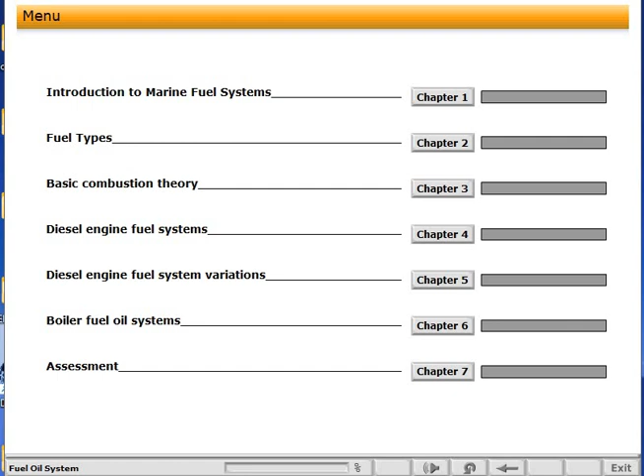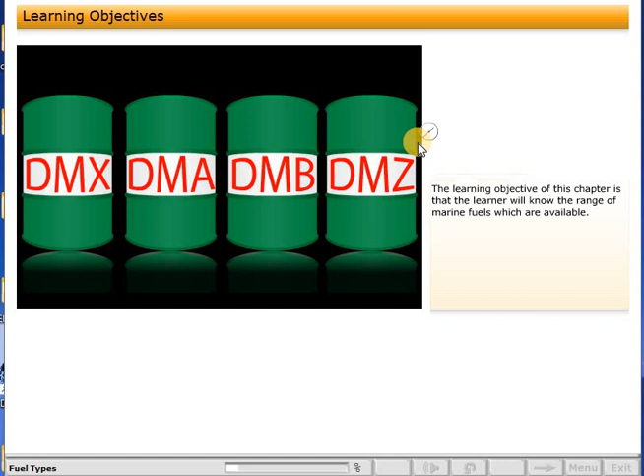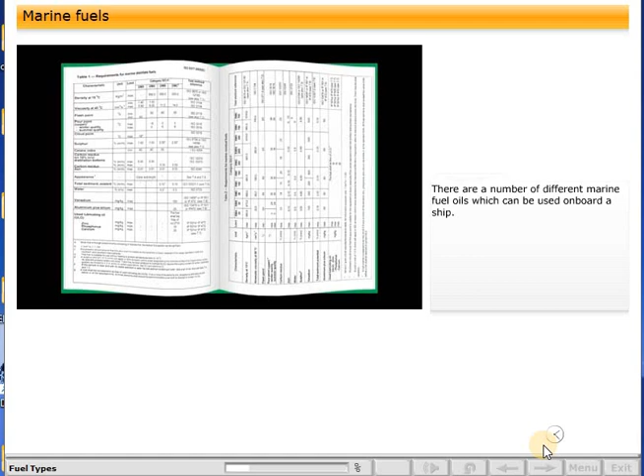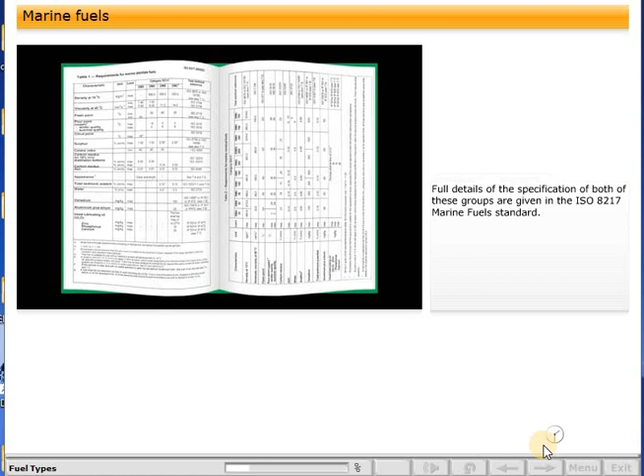The learning objective of this chapter is that the learner will know the range of marine fuels which are available. There are a number of different marine fuel oils which can be used on board a ship. They can generally be classed into two groups, distillate fuels and residual fuels. Full details of the specification of both of these groups are given in the ISO 8217 Marine Fuel Standard.

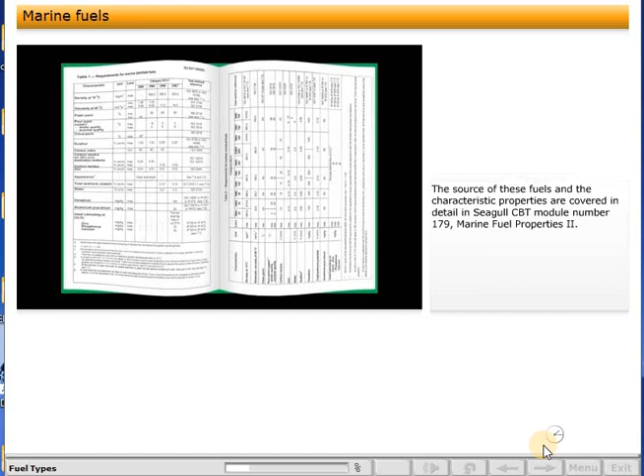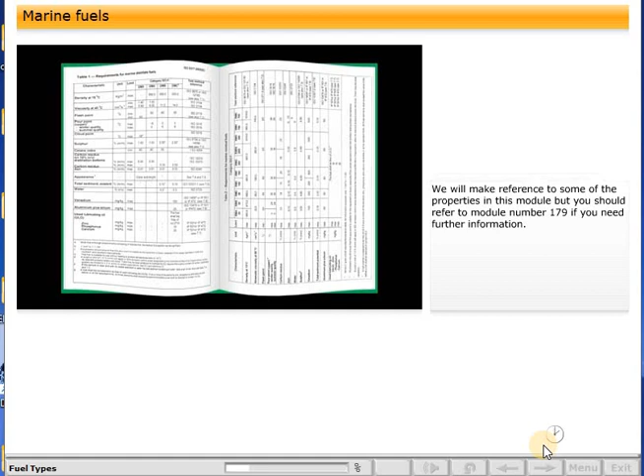The source of these fuels and the characteristic properties are covered in detail in Seagull CBT Module number 179, Marine Fuel Properties 2. We will make reference to some of the properties in this module, but you should refer to Module number 179 if you need further information. The actual fuel being used will, to some extent, determine the components in the fuel system.

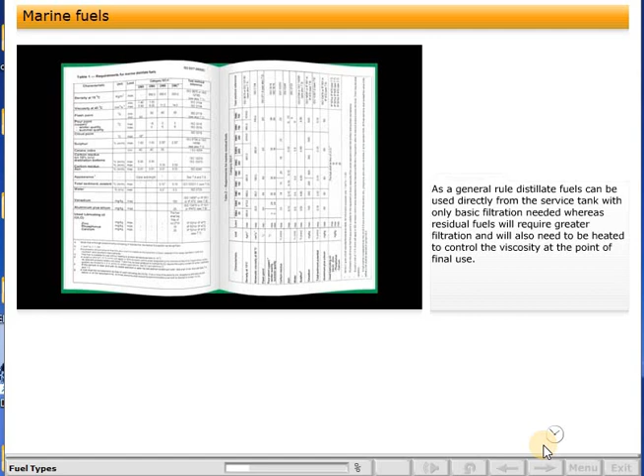As a general rule, distillate fuels can be used directly from the service tank, with only basic filtration needed, whereas residual fuels will require greater filtration, and will also need to be heated to control the viscosity at the point of final use. We will look at some of the common fuels next.

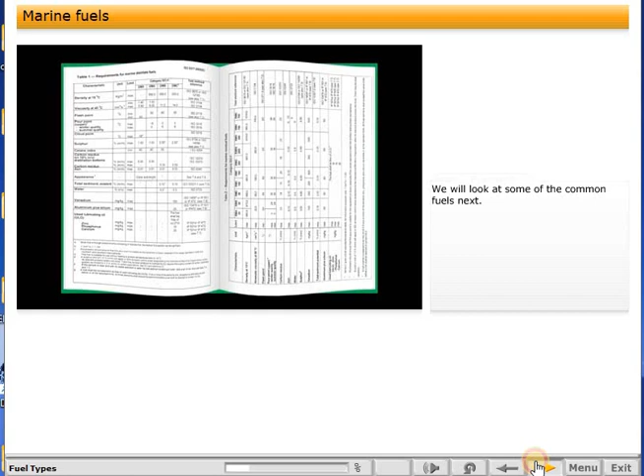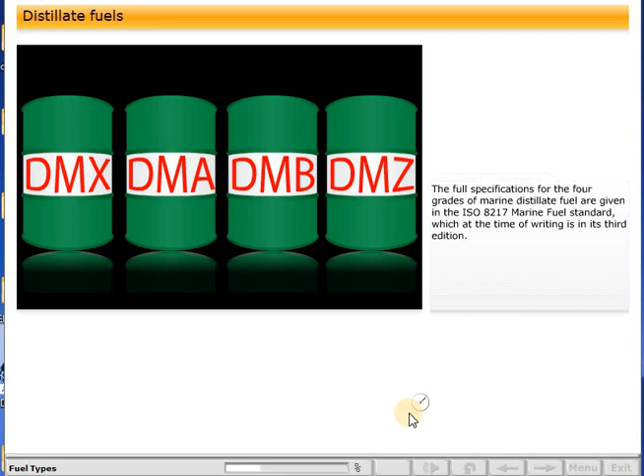Distillate fuels, strictly speaking, are those fuels obtained directly from the distillation process as a result of crude oil refining. Some of the marine distillate fuels are, however, blends of pure distillates and heavier fuel oils. The full specification for the 4 grades of marine distillate fuel are given in the ISO 8217 Marine Fuel Standard.

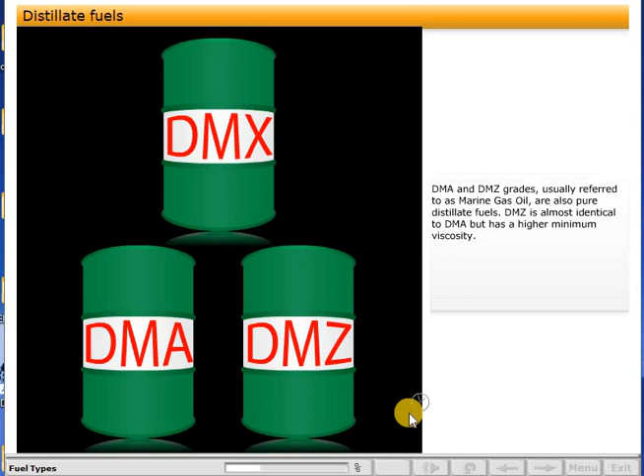DMX grade marine distillate is a high-grade pure distillate which is used only for special applications such as operation of emergency diesel engines. DMA and DMZ grades, usually referred to as marine gas oil, are also pure distillate fuels. DMZ is almost identical to DMA, but has a higher minimum viscosity. They are normally used on small engines, such as those found on tugboats and fishing vessels.

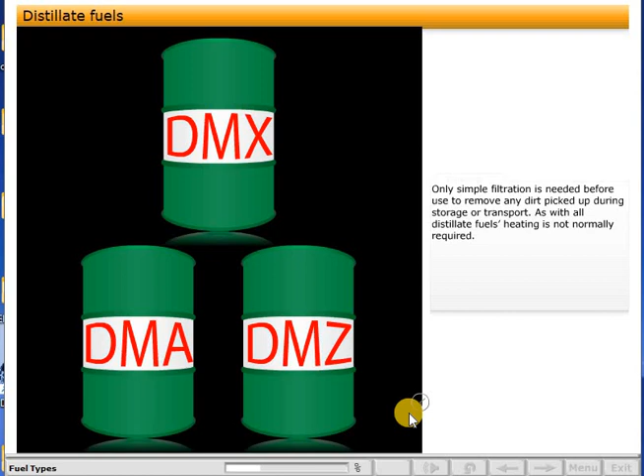Only simple filtration is needed before use to remove any dirt picked up during storage or transport. As with all distillate fuels, heating is not normally required. The last distillate grade, DMB, often referred to as marine diesel oil, is the distillate grade most commonly used by commercial shipping, usually as fuel for auxiliary diesel engines or for cold start of main diesel engines and boilers.

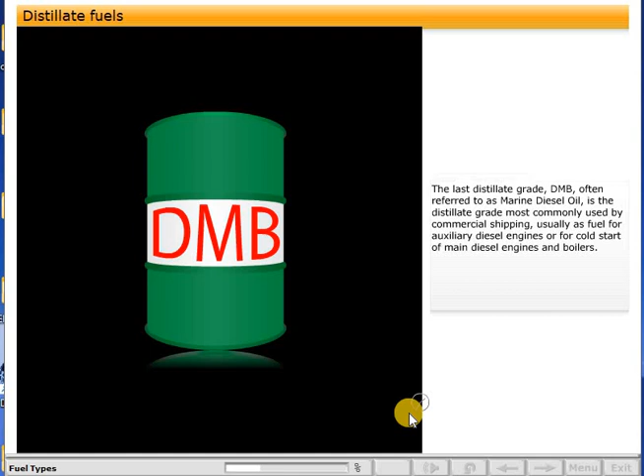DMB grade is essentially dirty marine gas oil with only a trace of heavy or residual fuel content. More thorough cleaning and filtration is required for marine diesel than for gas oil before it can be used in a diesel engine.

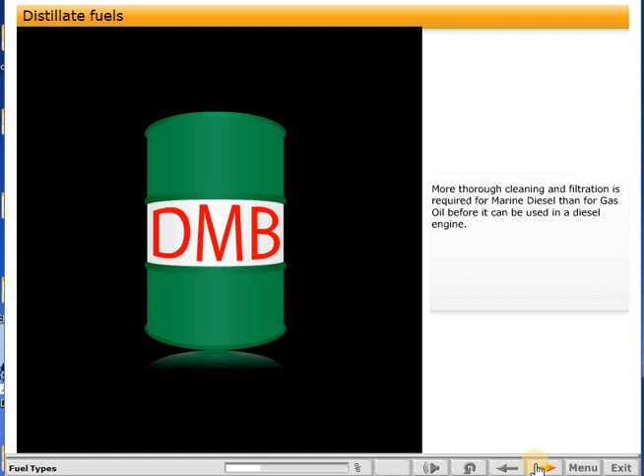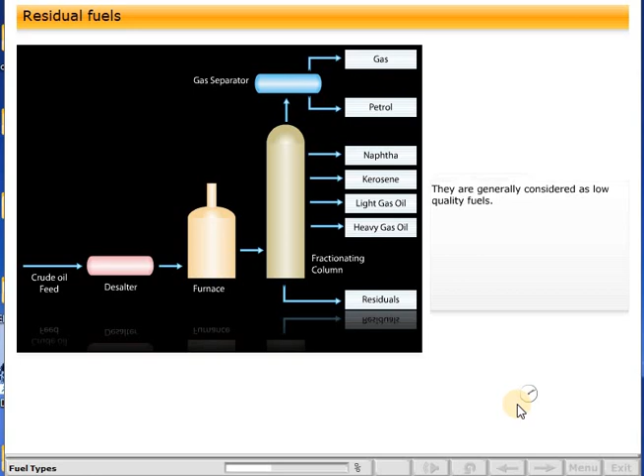Marine residual fuels are a byproduct of the refining process and are obtained from the residues of the various distillation processes. They are generally considered as low-quality fuels. There are many grades specified in the ISO 8217 fuel standard, defined by various physical properties, including viscosity and the type and level of contaminant content. Residual fuels require extensive pre-treatment before use. This will include heating to bring the viscosity down to an acceptable level.

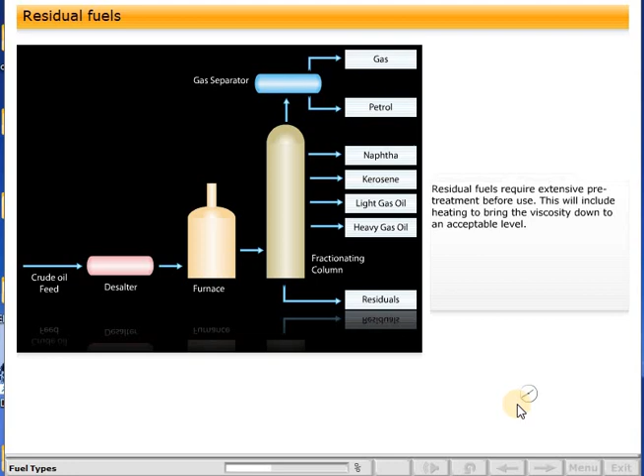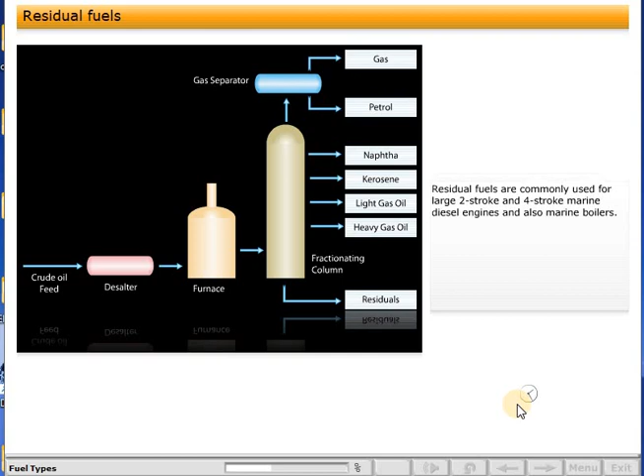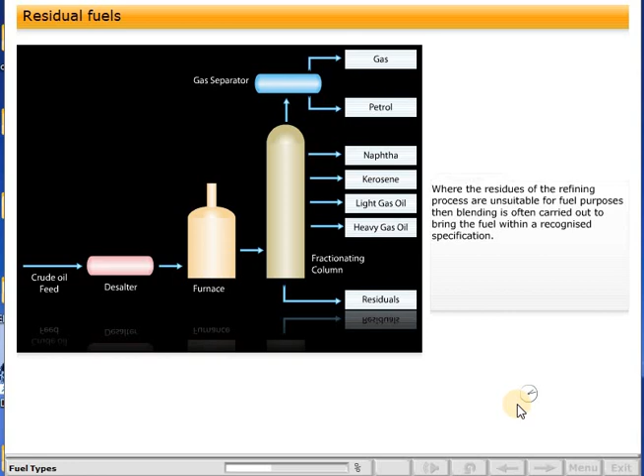Residual fuels are commonly used for large 2-stroke and 4-stroke marine diesel engines and also marine boilers. Many auxiliary engines have now been designed to operate on residual fuels. Where the residues of the refining process are unsuitable for fuel purposes, then blending is often carried out to bring the fuel within a recognized specification. Click on the button to learn more about blended fuels.

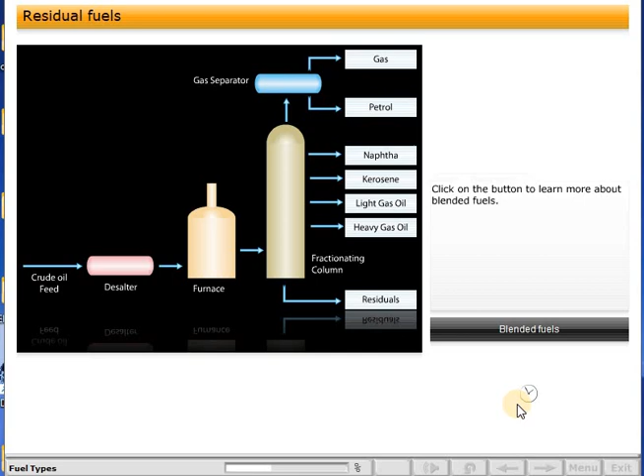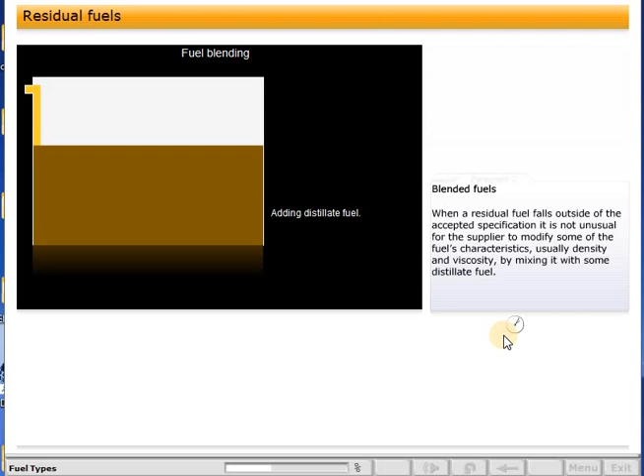When a residual fuel falls outside of the accepted specification, it is not unusual for the supplier to modify some of the fuel's characteristics, usually density and viscosity, by mixing it with some distillate fuel. This process is known as blending. Although blending can result in a fuel which is acceptable and meets the requirements of the fuel standard, it can also result in fuel stability problems.

A fuel is said to be stable if it maintains its characteristics during storage, treatment, and use. Sometimes a blended fuel will be unstable, and the different components of the blend will separate. This can result in serious problems, since the residual component may have characteristics which make it unfit for purpose. Incompatibility can also be a problem with blended fuels if the components react together, resulting in heavy sludge formation either during storage or pre-treatment.

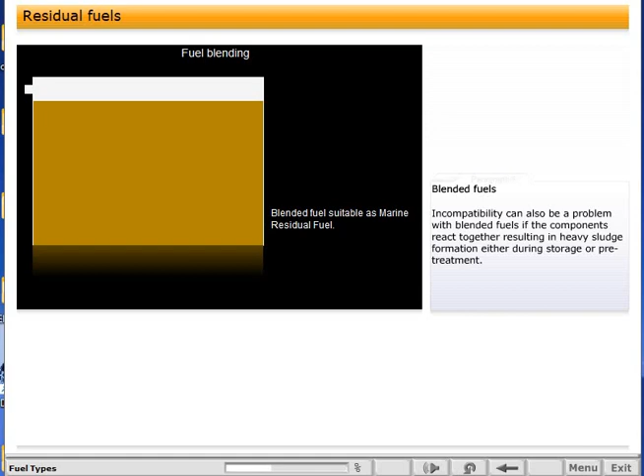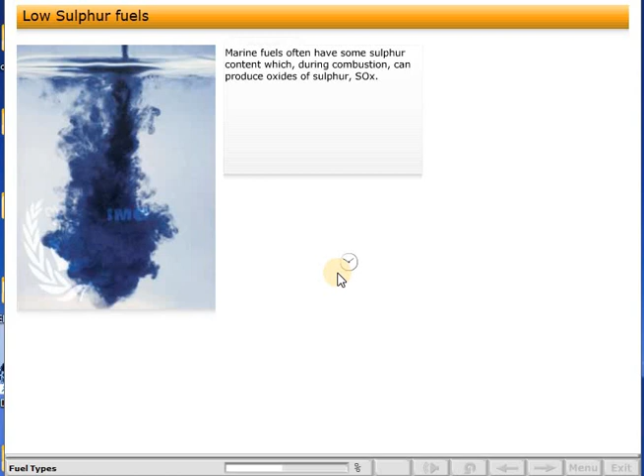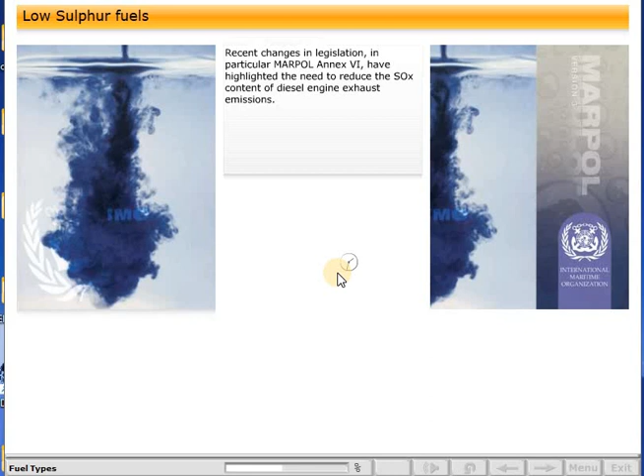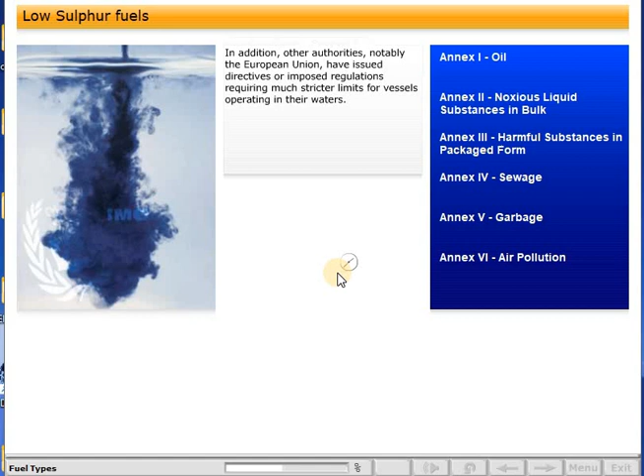Marine fuels often have some sulfur content, which, during combustion, can produce oxides of sulfur, SOx. Recent changes in legislation, in particular MARPOL Annex 6, have highlighted the need to reduce the SOx content of diesel engine exhaust emissions. The main focus in achieving this has been to place limits on the sulfur content of marine fuels. In addition, other authorities, notably the European Union, have issued directives or imposed regulations requiring much stricter limits for vessels operating in their waters.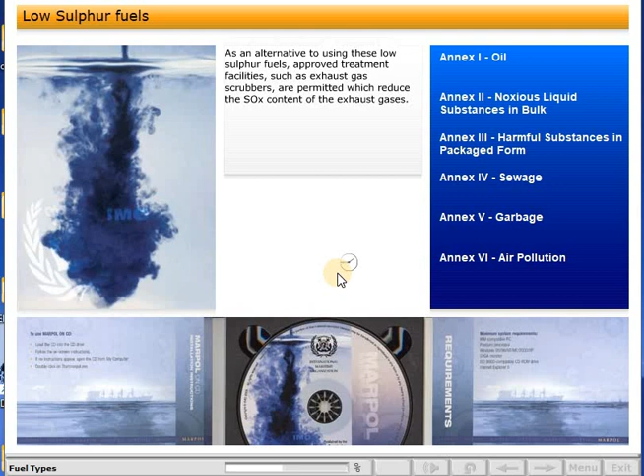As an alternative to using these low-sulfur fuels, approved treatment facilities, such as exhaust gas scrubbers, are permitted, which reduce the SOx content of the exhaust gases. We will look at some of the issues related to the use of these fuels later in the module. Click on the button to learn more about low-sulfur fuel legislation.

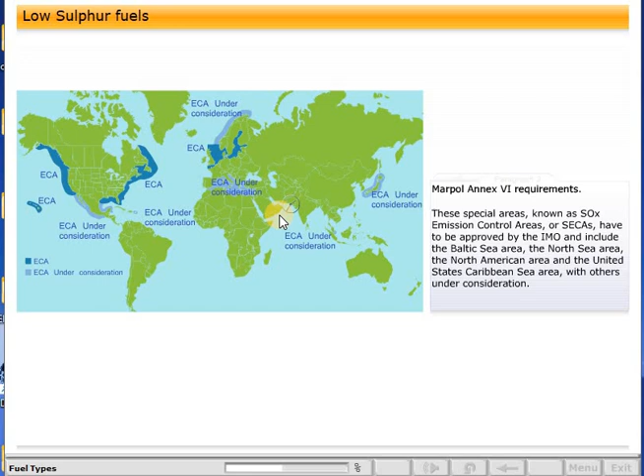MARPOL Annex 6 has two sets of limits for the maximum sulfur content of fuel oils, one for general use and a lower limit for special areas, where sulfur oxide pollution has been shown to be a significant problem. Both limits are scheduled to be reduced. These special areas, known as sulfur oxide emission control areas, or SECAs, have to be approved by the IMO, and include the Baltic Sea area, the North Sea area, the North American area, and the United States Caribbean Sea area, with others under consideration.

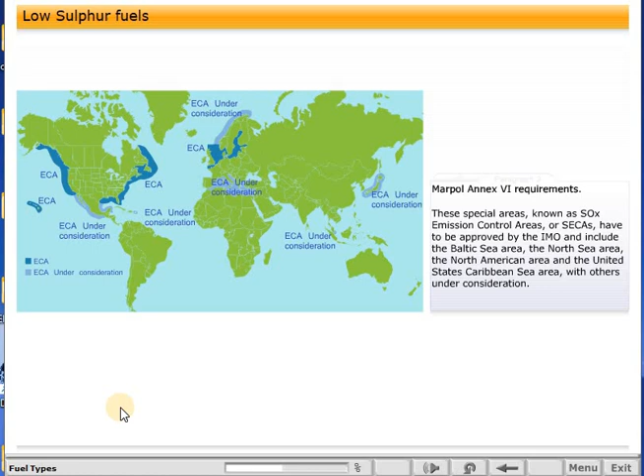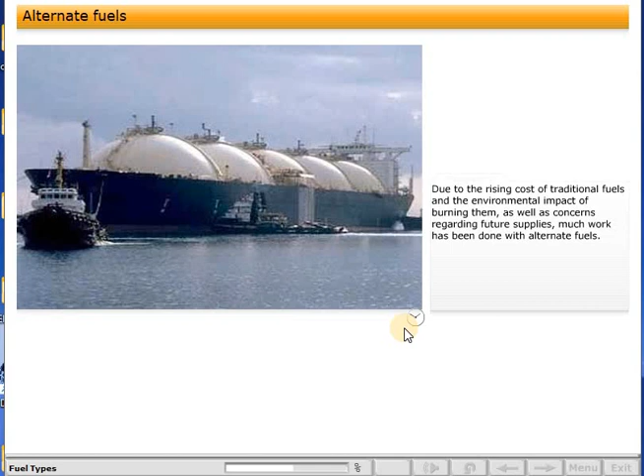Due to the rising cost of traditional fuels and the environmental impact of burning them, as well as concerns regarding future supplies, much work has been done with alternate fuels. Since these alternate fuels may require major modification to the onboard fuel systems, they should be mentioned in this module. The two main alternatives at present are gas from cargo boil-off and biodiesel. You can learn more about these by clicking on the buttons.

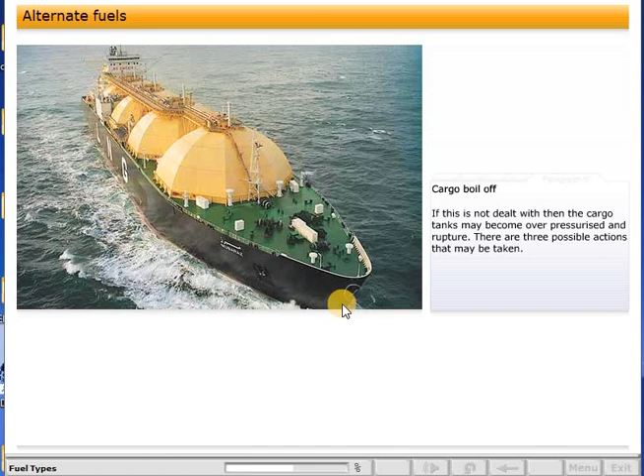There are three possible actions that may be taken. Vent the gas to atmosphere. This is wasteful and harmful to the environment. Reliquefy the gas. This requires an expensive complex plant. Use the boil-off as a fuel to power the ship. This is the usual method adopted. Due to technical limitations, it was easier to adapt boiler combustion systems to gas burning than diesel engine systems. Therefore, most LNG vessels have been powered by steam turbines.

The development of so-called dual fuel systems for diesel engines has resulted in an increase in the number of diesel engine-powered LNG tankers. Some new builds have either diesel or diesel-electric propulsion. We will look at dual fuel systems in detail later in the module.

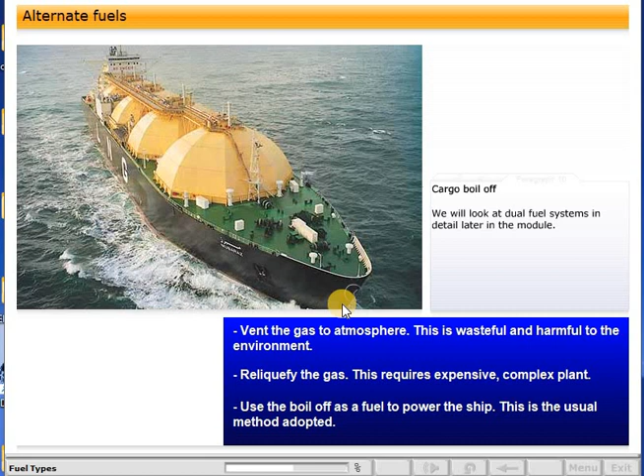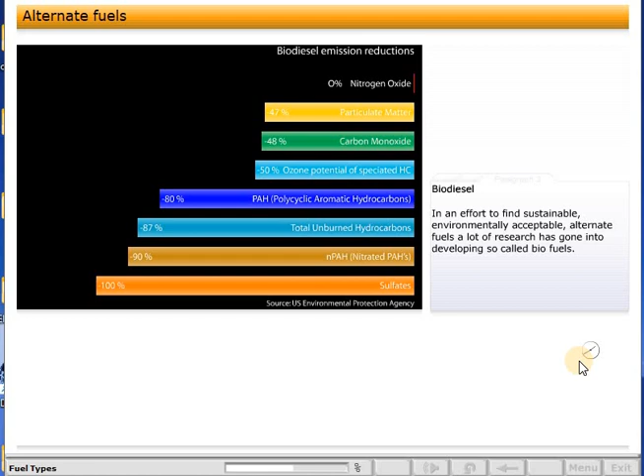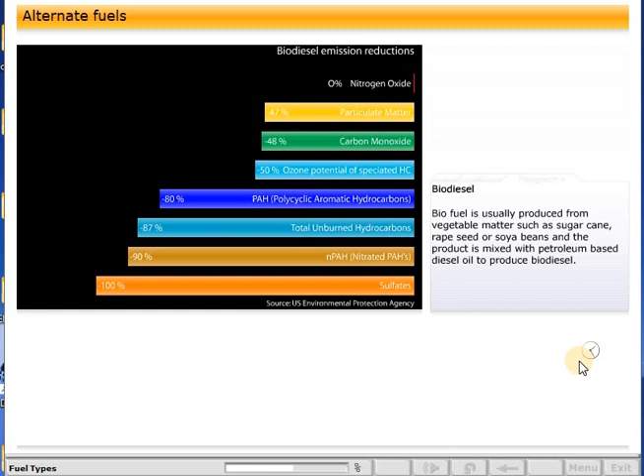The current extensive use of petroleum-based fuels is the cause of great concern, firstly due to the rate that oil reserves are being used up, and secondly due to the environmental impact of burning these fuels. In an effort to find sustainable, environmentally acceptable alternate fuels, a lot of research has gone into developing so-called biofuels. Biofuel is usually produced from vegetable matter such as sugarcane, rapeseed or soya beans, and the product is mixed with petroleum-based diesel oil to produce biodiesel. Biodiesel mixtures containing less than 20% biofuel can usually be used in a diesel engine without any modifications to the engine.

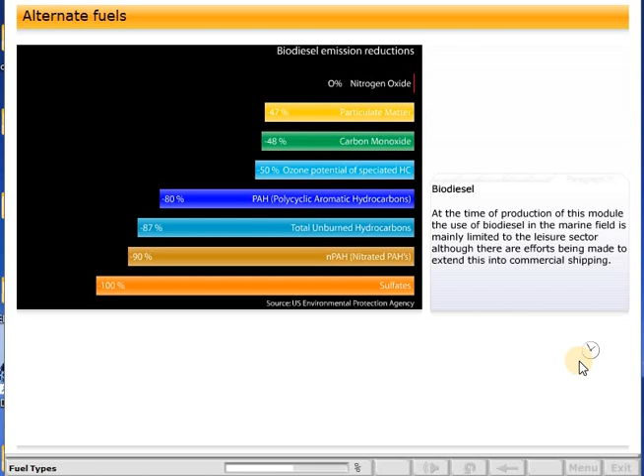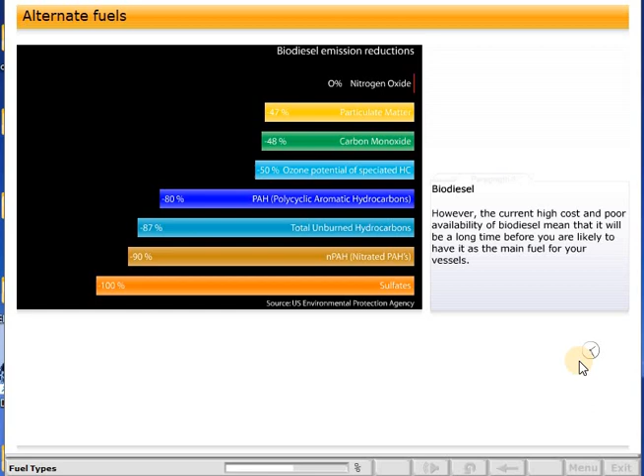At the time of production of this module, the use of biodiesel in the marine field is mainly limited to the leisure sector, although there are efforts being made to extend this into commercial shipping. Some large diesel engines have been successfully tested with biodiesel, and a number of shoreside installations are being operated on these fuels. However, the current high cost and poor availability of biodiesel mean that it will be a long time before you are likely to have it as the main fuel for your vessels.

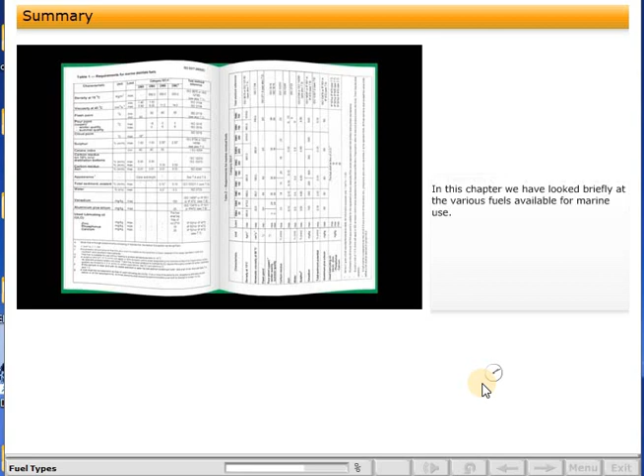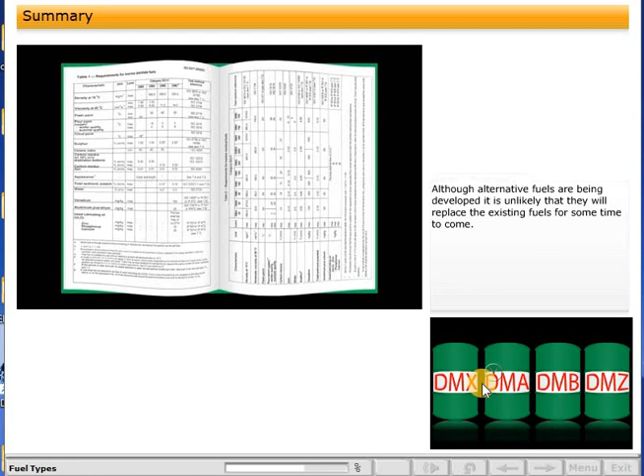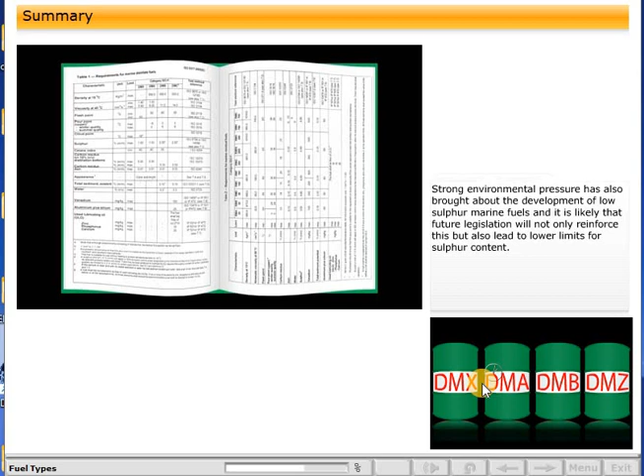In this chapter, we have looked briefly at the various fuels available for marine use. Although alternative fuels are being developed, it is unlikely that they will replace the existing fuels for some time to come. Strong environmental pressure has also brought about the development of low-sulfur marine fuels, and it is likely that future legislation will not only reinforce this, but also lead to lower limits for sulfur content. As we will see later in the module, this has already influenced diesel engine fuel systems and how we operate the engines. Try the questions and the following self-test to check your understanding so far.